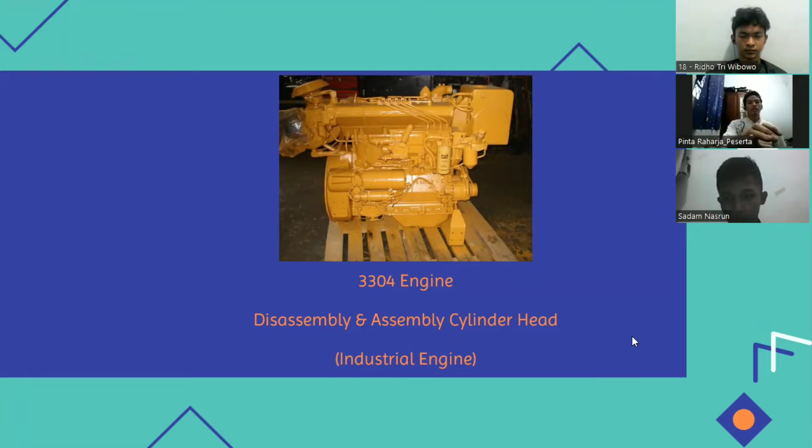I'm here today to talk to you about how to disassemble and assemble the cylinder head. The cylinder head is the component of the 3304 engine from an industrial engine. It will take around 10 minutes or more of your time.

There are 3 main parts to my presentation. To begin with preparation, following that with disassembly, and last but not least is assembly. Please hold your questions until the end of our presentation, and please write your question in the comment column.

For preparation, what should we do when we prepare for the job? First is tools. We should prepare the tools. What tools do we need? The first is one set of toolbox, then 2 bracket links. This is the picture of the tools. On the top is the toolbox and the bottom is

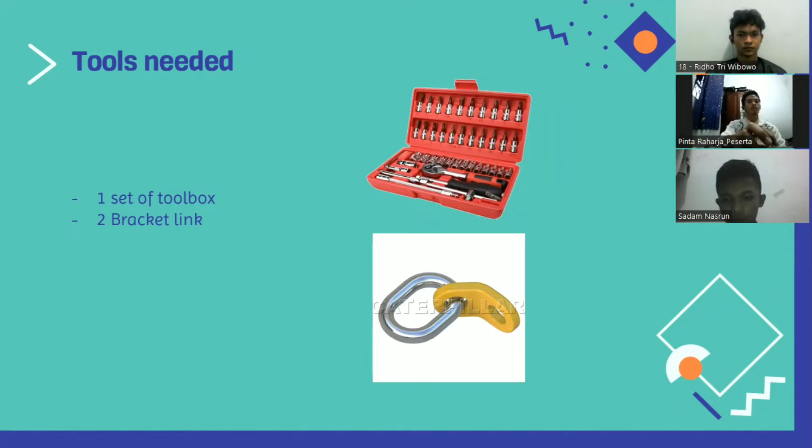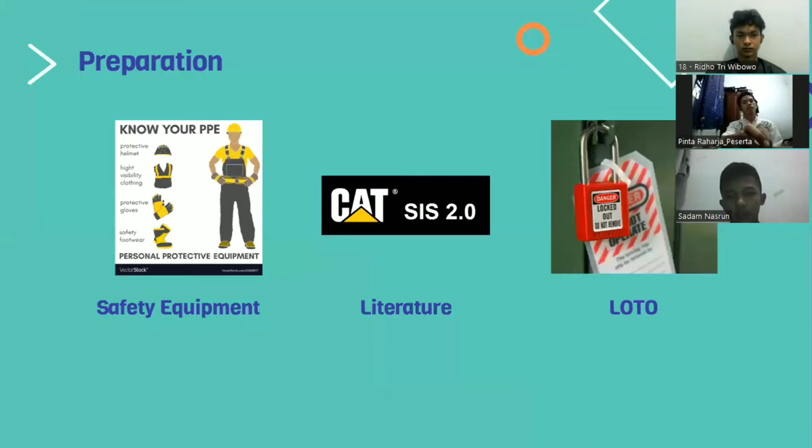the bracket link. The next is preparation of the safety equipment like protective helmet, high visibility clothing and protective gloves, and the last is safety footwear or safety shoes. And we must prepare literature. What literature do we use? There is a Caterpillar SIS 2.0 for our literature, and the last thing we should prepare is lockout, tagout, or LOTO for safety when we perform the job.

The next is disassembly. The disassembly part will be explained by Ridho Wibowo. Please, Ridho Wibowo, explain this part. Okay, thank you, Pinta, for letting me continue the presentation.

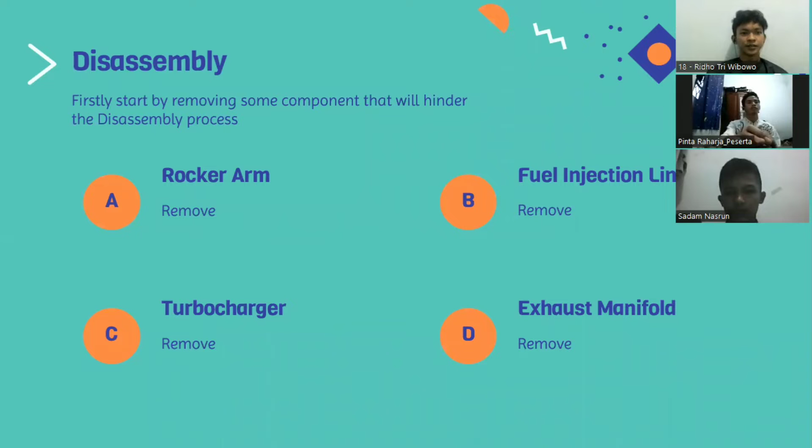Next, I will explain to you guys how to disassemble the cylinder head. Before we start disassembling the cylinder head, first things first, we start by removing some components that will hinder the disassembly process, like the rocker arm, fuel injection line, turbocharger, and exhaust manifold. After we remove those components, we can start disassembling the cylinder head. Next.

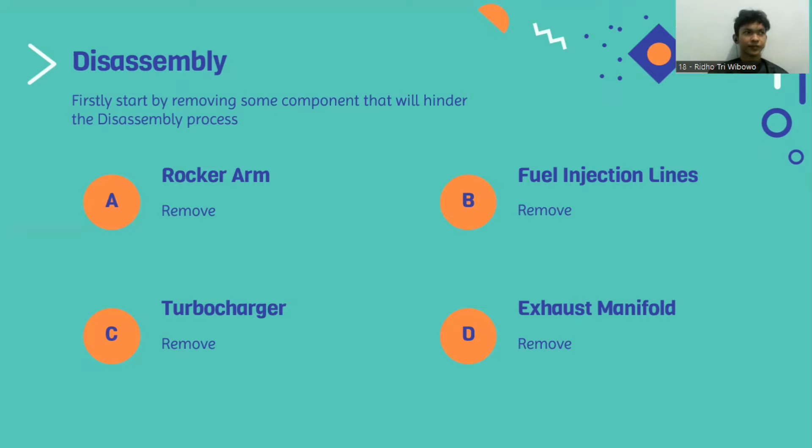Okay, next we're going to start disassembling the cylinder head. First, we must disconnect the tube assembly from the turbocharger air elbow. After that, remove 4 bolts, elbow, and gasket from the cylinder head. Second is remove the water temperature sending unit, picture number 2, from the elbow, picture number 4. Next, remove bolts, picture number 1 and 3, that fasten the elbow to the cylinder head and the water pump.

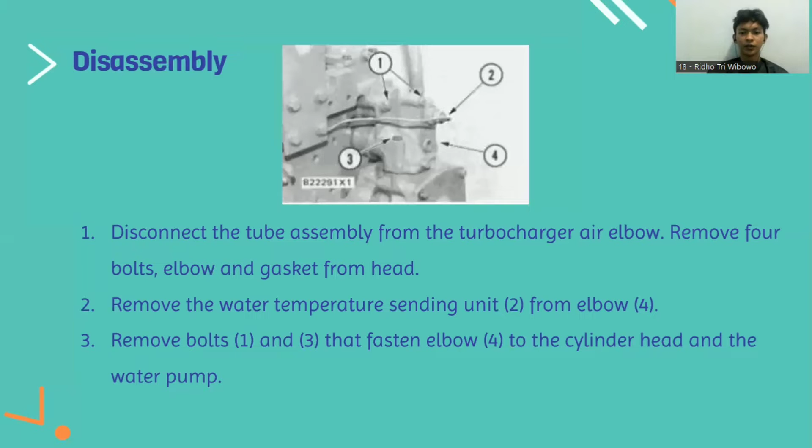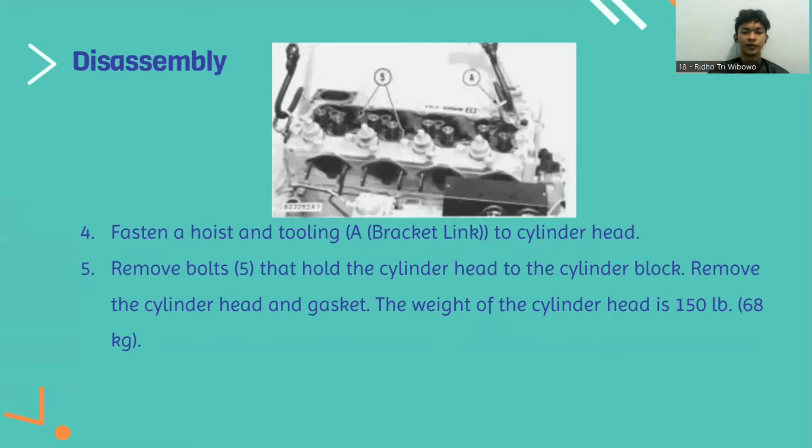After that, we fasten a hoist and tooling. The tool name is bracket link, picture A, to the cylinder head. After that, remove the bolts, picture number 5, that hold the cylinder head to the cylinder block. Next, remove the cylinder head and gasket. For your information, the weight of the cylinder head is 68 kilograms, so we must pay attention while lifting the cylinder head. And then we finish disassembling the cylinder head.

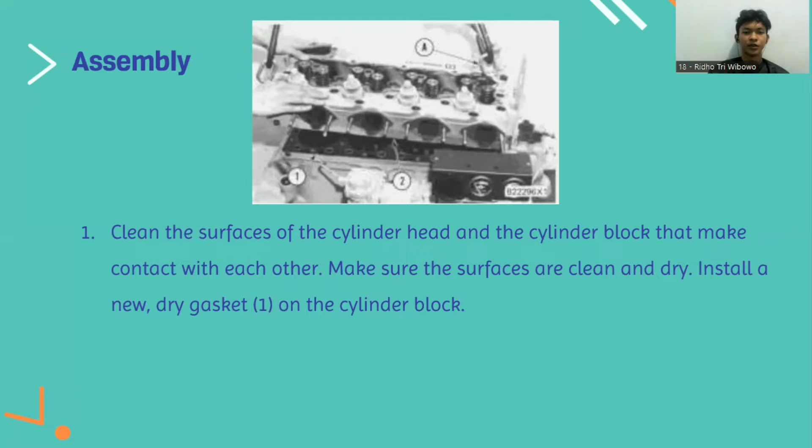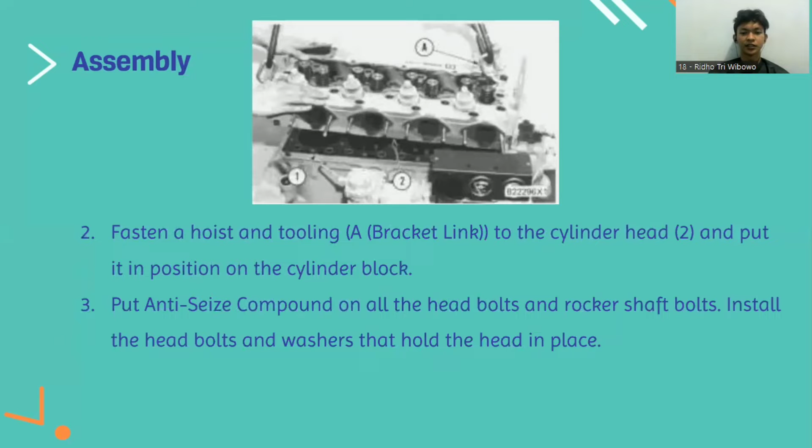Second step is fasten a hoist and tooling bracket link, picture A, to the cylinder head, picture number 2, and put it in position on the cylinder block. After that, put anti-seize compound on all the head bolts and rocker shaft bolts. After that, install the head bolts and washers to hold the head in place.

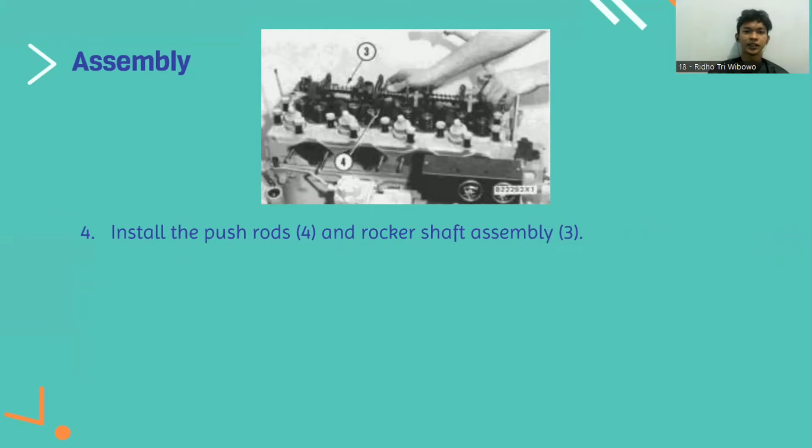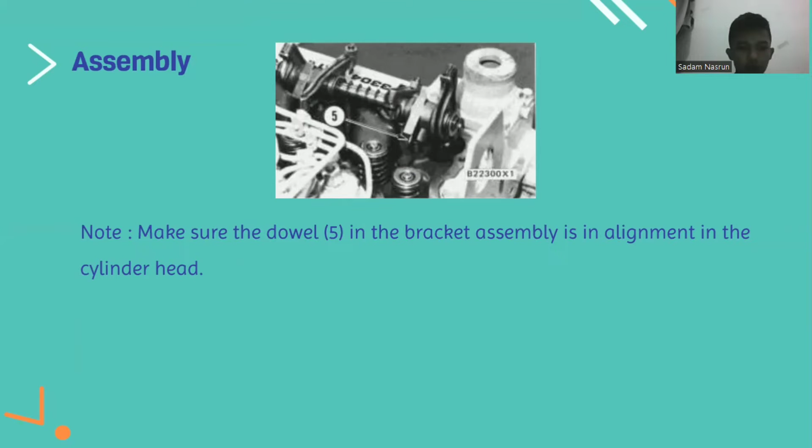Next, we install the push rods, picture number 4, and the rocker shaft assembly, picture number 3. For your information, make sure the dowel, picture number 5, in the bracket assembly is aligned in the cylinder head, so the cylinder head will not move from its place. The next part will be explained by Sadam Nasrun.

Okay, thank you, Ridho Wibowo. I will continue the presentation. We are still talking about assembly. Step number 5 is install the bolts and washers that hold the rocker shaft assembly in place. We must pay attention that the bolts and washers are in the ideal position when installing them to prevent damaging a bolt. Next.

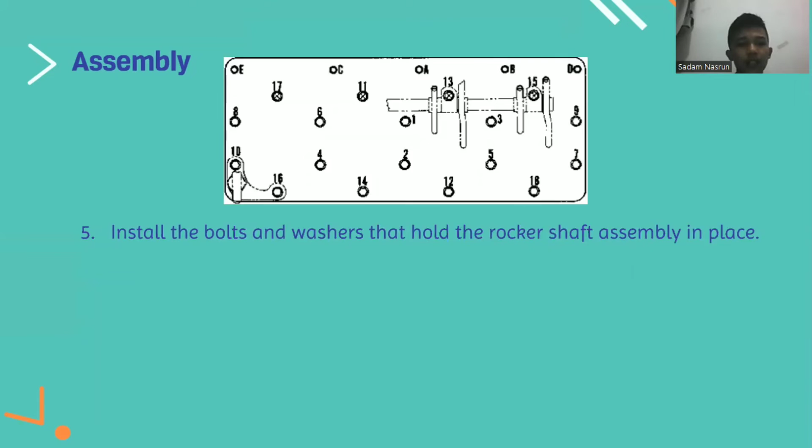Step number 6. Before I explain step number 6, please give your attention to the symbol you can see in the picture. The plus-or-minus symbol is the tolerance, it's measurable. Okay, the next step is tighten the bolts in number sequence to a torque of 115 pounds-feet or 155 Newton meters.

Next, tighten the bolts again in number sequence to a torque of 185 pounds-feet or 250 plus or minus 17 Newton meters. Next, tighten the bolts again in number sequence to a torque of 185 plus or minus 13 pounds-feet or 250 plus or minus 17 Newton meters.

Okay, D, tighten the bolts in letter sequence to a torque of 32 pounds-feet or 43 plus or minus 7 Newton meters. Okay, next, tighten the bolts again in letter sequence to a torque of 32 pounds-feet or 43 plus or minus 7 Newton meters. Next.

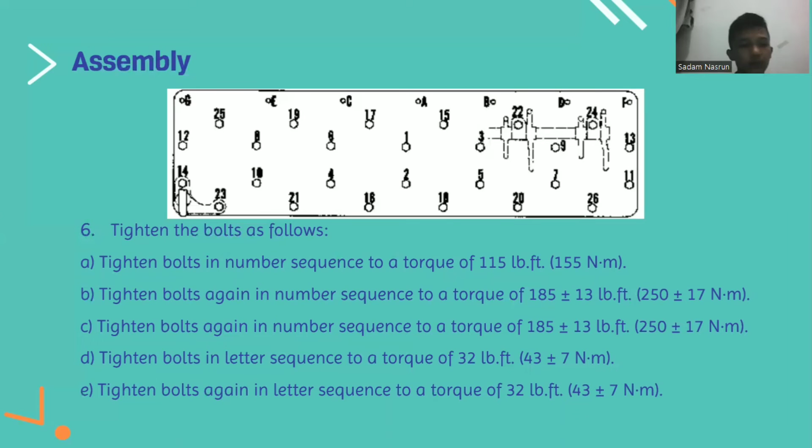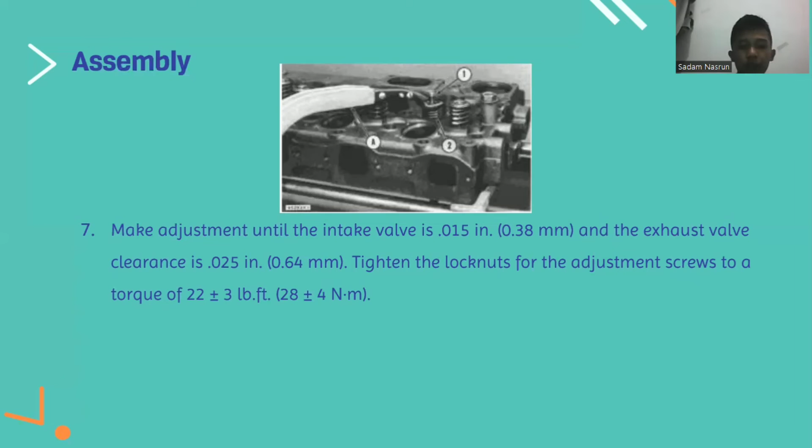Okay, step number 7 is make adjustments until the intake valve clearance is 0.015 inch, in other units 0.38 millimeter, and the exhaust valve clearance is 0.025 inch, in other units 0.64 millimeter. Tighten the lock nut for the adjustment screw to a torque of 22 plus or minus 3 pounds-feet, in other units 28 plus or minus 4 Newton meters.

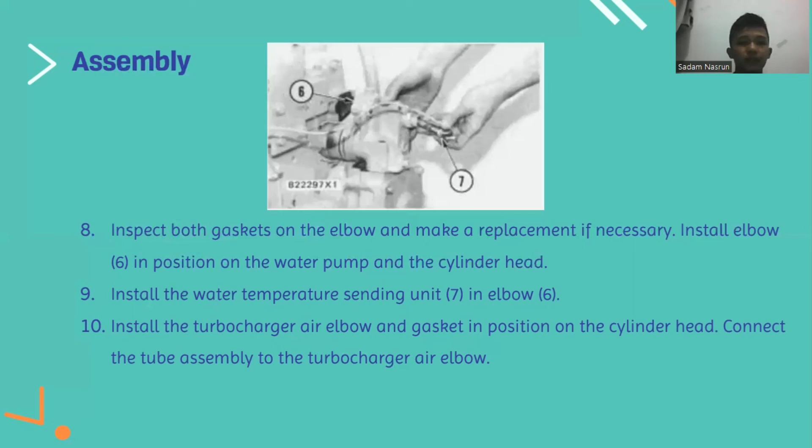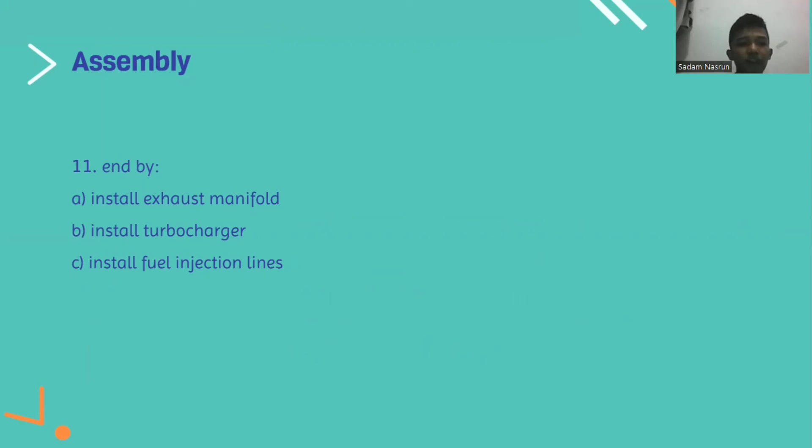On this page you can see, I repeat again, the elbow is number 6. Number 10, install the turbocharger air elbow and gasket in position on the cylinder head. Connect the tube assembly to the turbocharger air elbow. Okay, the last steps end by installing the exhaust manifold, installing the turbocharger, and installing the fuel injection lines. Okay, let's move to Pinta Raharja.

Okay, thank you, Sadam Nasrun. And that brings me to the end of our presentation. Let me give you a summary of what we've been talking about over the last 10 minutes. First, we must prepare the tools, safety, and literature regarding the job. Second, we must do the job based on the literature. And last, finish the job without any accident.